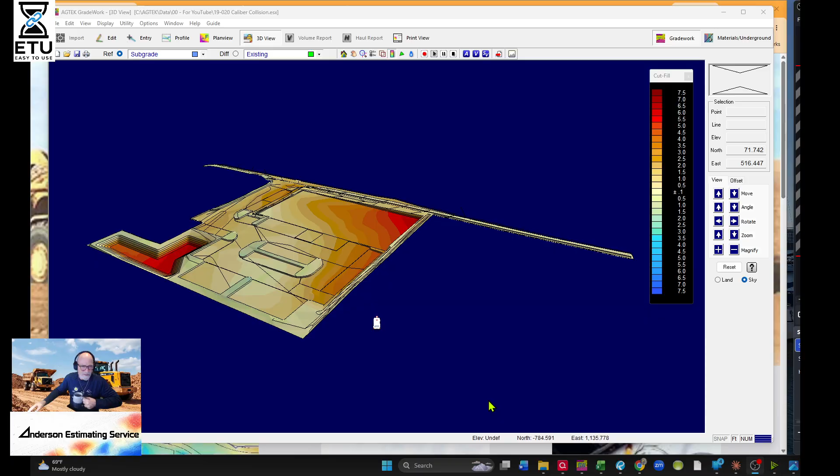So yeah, I just can't do anything. There's my website - I've been doing websites so much lately, and here's my website, ETU Hyperlink, track any link, and I put some videos on there. But yeah, I got top ranked in 4 hours. Got to go look at the video. But yeah, that's not this video.

This video is about Anderson Estimating Service. And oh my gosh, I have been so blessed - look at this, this is my schedule. I took out the job name, it's all confidential, but let's see if you'll be able to see this with the virtual background. I kid you not, this is amazing. I got dumped a bunch of work yesterday, and of course I said yes, of course, yes, of course.

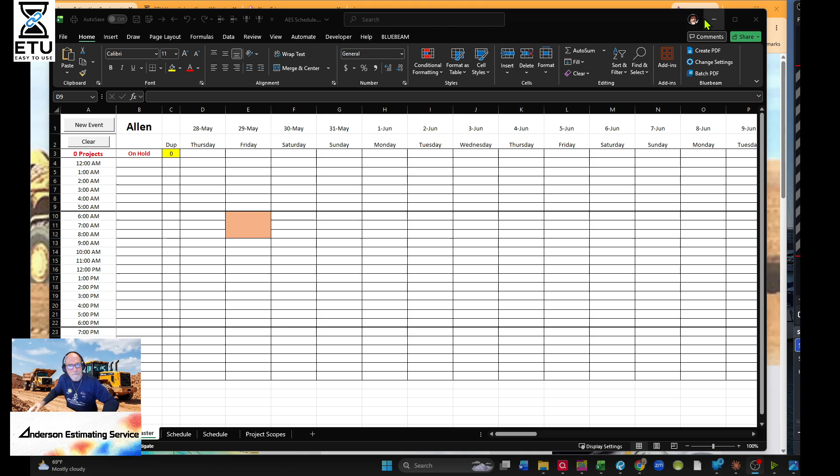So yesterday I have all these work orders - I don't know if you can see it, but there's 12. So I have like 40 hours worth of work. Thank you, Jesus, oh my gosh. Thank you everybody, that's awesome. So this schedule will completely fill up. That was amazing yesterday, going from nothing to this in like 4 hours.

In 4 hours, I wasn't just on page 2, I was right on top in videos. Within an hour it's just boop, YouTube just pops you right in there. I was right on the very top of DuckDuckGo, and then Google - that'll take some time, it's normally not like that. But you can go in there, and I'm gonna be checking on it every 2 days. It's so unique, the name ETU Hyperlink.

So anyways, let's go over this job. But first, coffee. Let me get you back over to the screen - AGTEK, so you can look at it. Let's go over to edit, design, data lines.

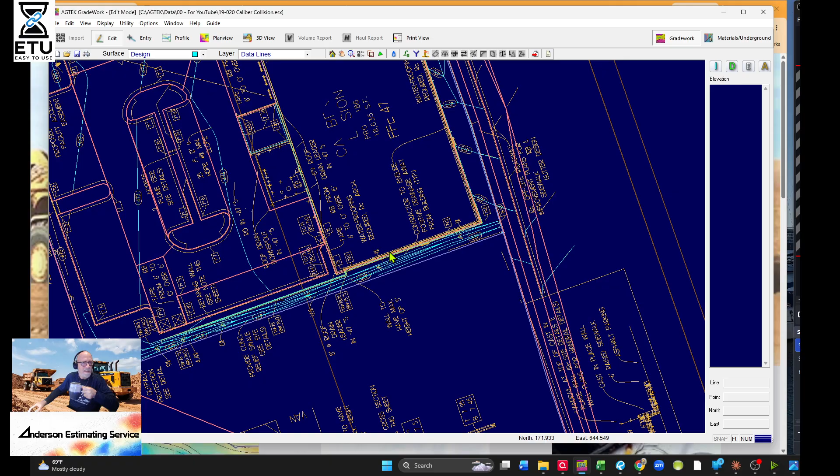Let's see, hopefully the sheets will come in. Come on. Insert - oh, can't find plans. That's why, because there's civil plans everywhere, so you don't want to do that. So let's go ahead and click on one, we'll see if it sees them. Yes, go ahead and show it where it is.

This is job 20. Yeah, I do about 300 jobs a year.

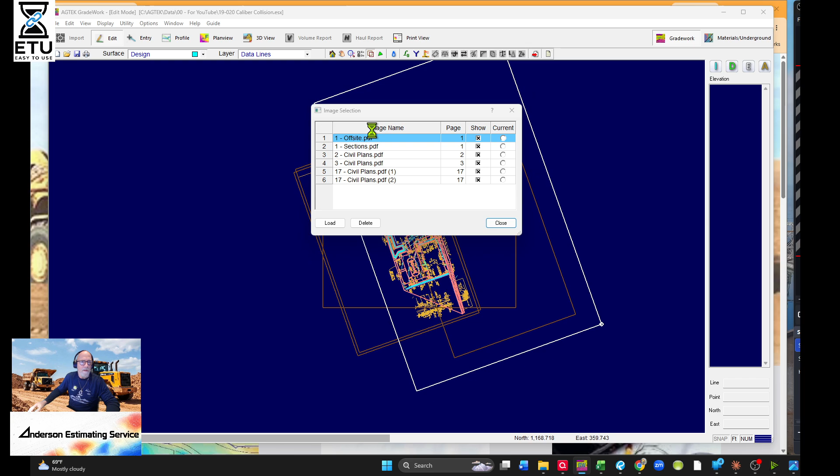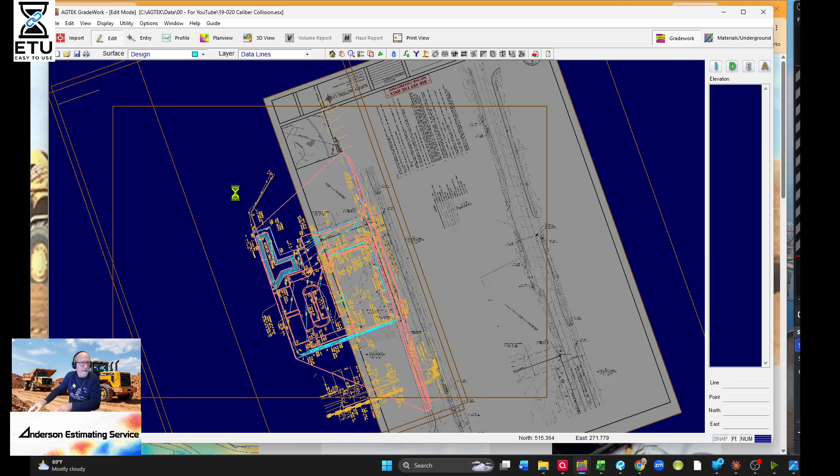It was called plan, we're just hoping it's the civil plan. Oh, I don't know, it says page 1, offsite. I don't know, it doesn't matter, we got it close, got it to the right place. Let's see if it just starts. Yep, just as I thought, now we got them. The rest of them are going to start coming in. Come on, baby. There we go, that's what we wanted.

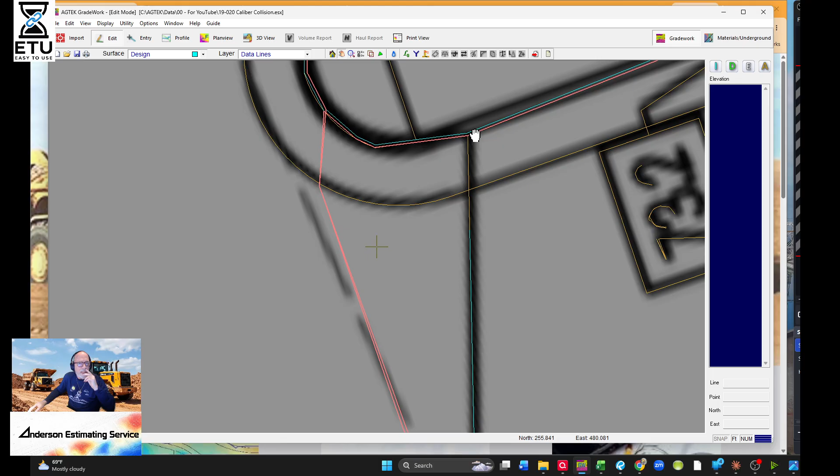It's so interesting the way every different engineer notes things - you always have to wonder, is it top of curb or is it finished grade? And you can see these contours, they ignore the curb, they blow right through the curb. If you clicked on it...

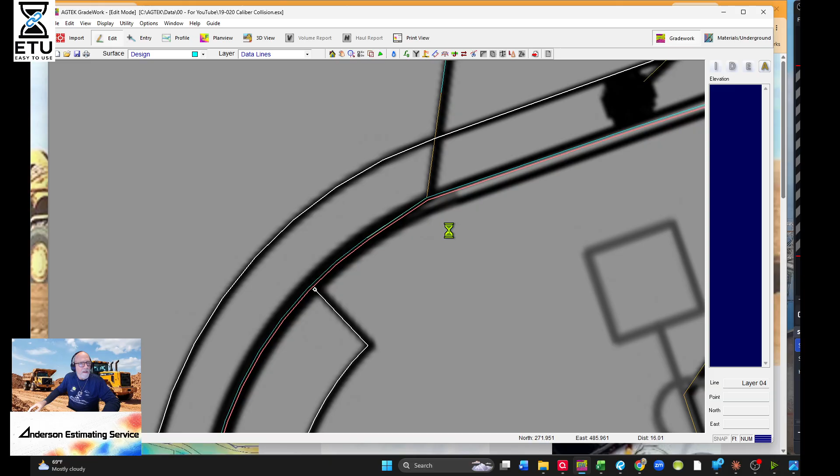Oh, it had all kinds of issues, there was trimming going on here. These plans were messed up - the contours, they can't blow through a curb. When a contour hits and changes grade, it turns. So when it hits a curb, it goes along that curb and then comes out the other side on the back of the curb. That's how I think of it.

You know, before there were computers, we used to actually hand draw our contours.

I really like this feature where it keeps track because I was always worried about trying to always look into the camera. They have this AI thing, and now even if I turn my head, even though I'm looking off to the side because I'm looking at my screen trying to do the controls, it makes my eyes look right.

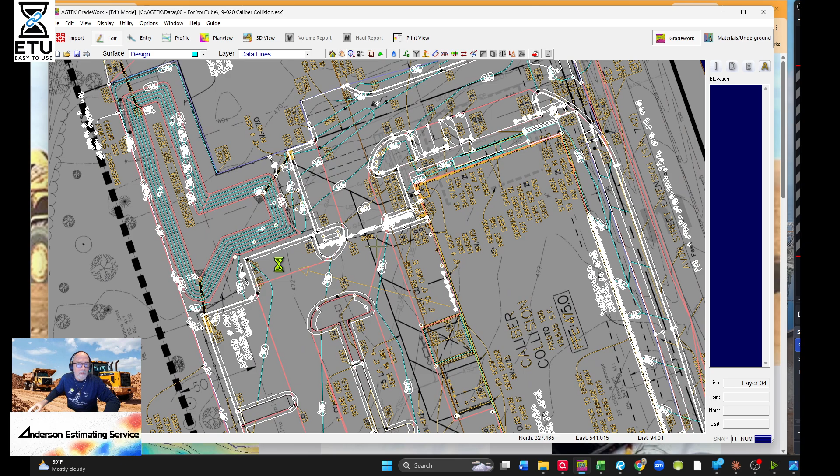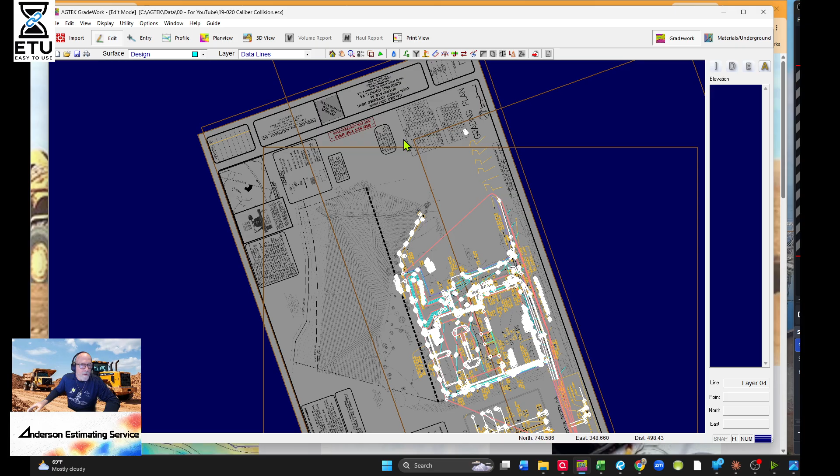But here we are back, so let's go. We'll do some curving here and I'll show you how that's done. This is a nice little job. Let's look at the 3D view. Where is this? Carrollton, Texas. It's not a CAD file, but I like to do the Google Earth approach. I'll show you what I do. Every curve, every point is entered when I do takeoffs.

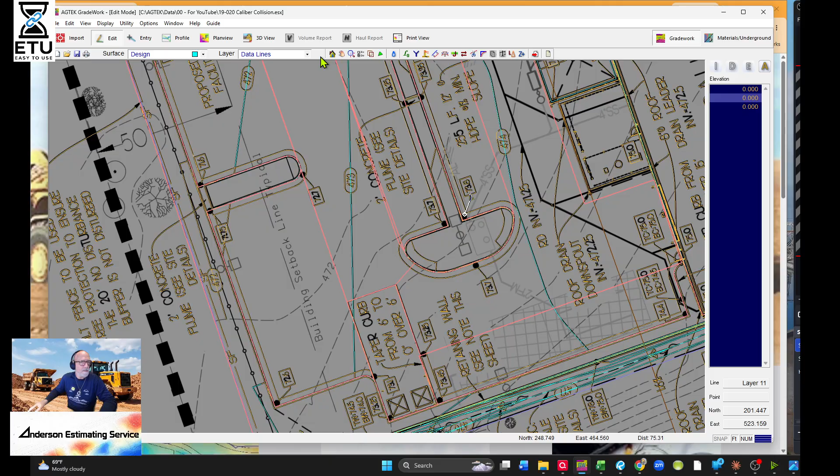Let's look at this. Let's get rid of the annotate, and let's get rid of the report regions, the balance region. Oh, that's probably for the offsite. And then sectional regions, and then we'll just show you the curve.

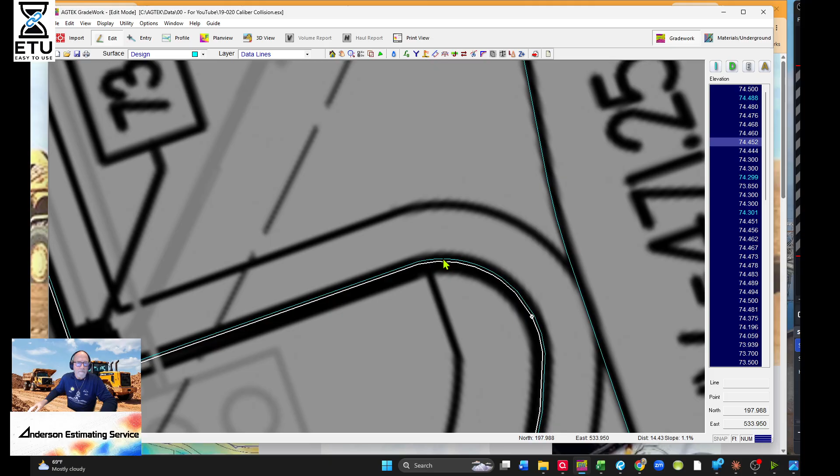You know, this is the old school way. I can't believe this was old school. This is when you did a tenth. If you looked down at the bottom, the distance - can you see that? If you looked really close on your screen and blew it up, it says tenth down here. That was the old school way.

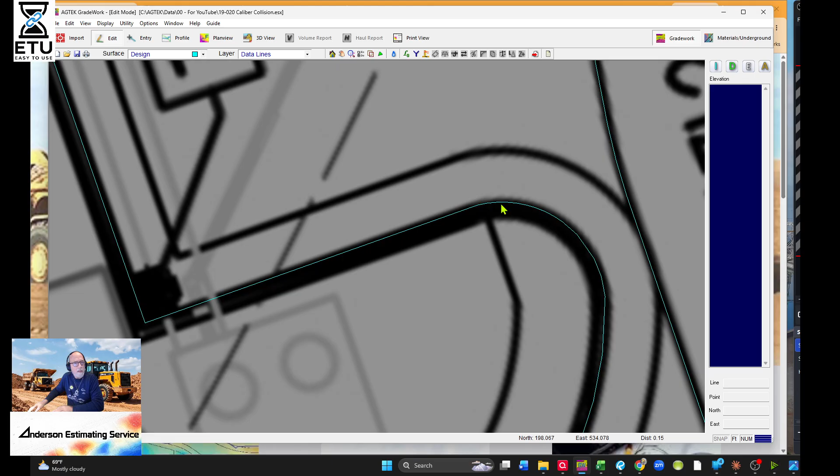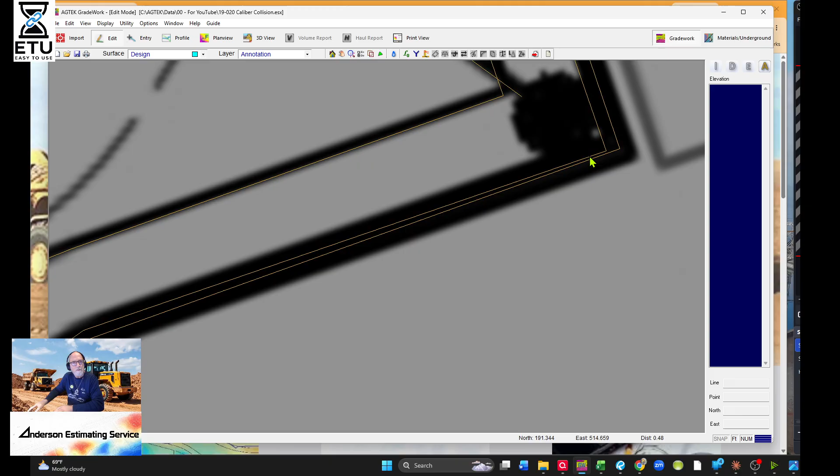But let's just get rid of this one, and we're going to annotate that one. These are okay to be there. This one I don't like - there's one extra one. Oh, that's the one we like, that's the one that came with the thing, so let's get rid of ours. Boom, this is the one that came with... oh, that's why, Control Z. I don't want this one. Get rid of this one. I'll be okay, I promise. There's a contour, we want to keep that. I just want to get rid of the ones that'll be in the way. There we are.

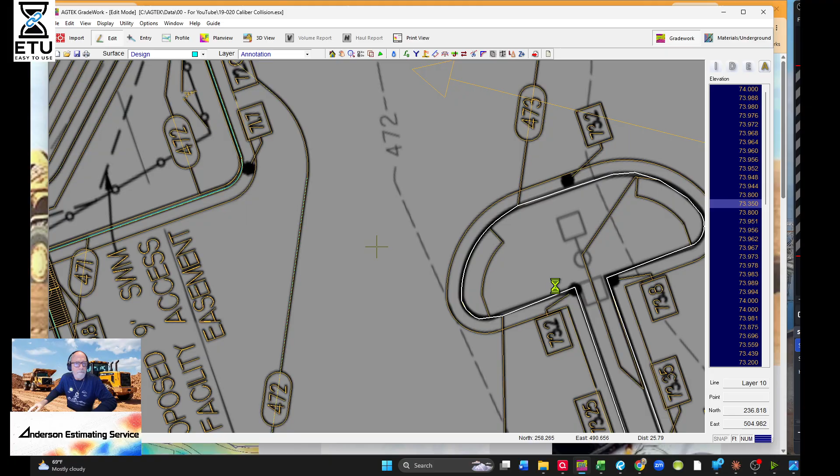And then I like to turn on the... since we're going to snap the points. So here's me, let's do a data entry, and let's make sure we're in 73. We truncated, you know.

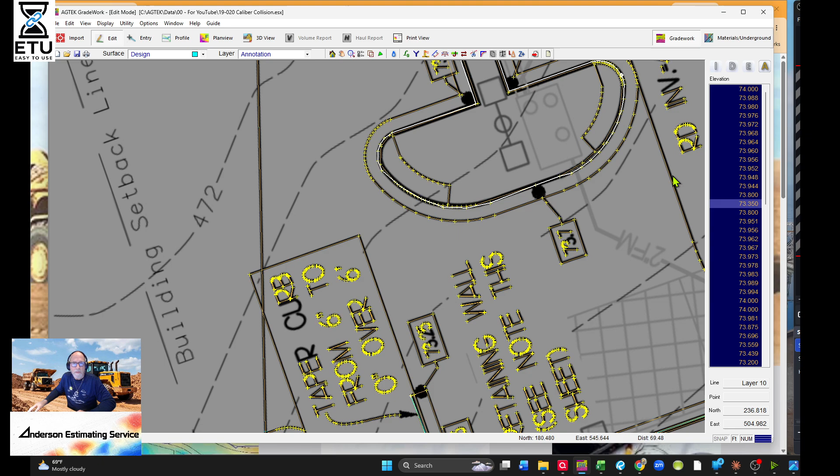Look, if you want to save time, get these elevations as truncated as possible. I try to look at the lowest point, but sometimes you have to enter three points, like 273. But this one, it looks like, and they're all easy, and they're all finished surface. We verified that before. 37. 73. 7302.

So there's, go into design data lines, and we want to back on the annotate. There we go, all right.

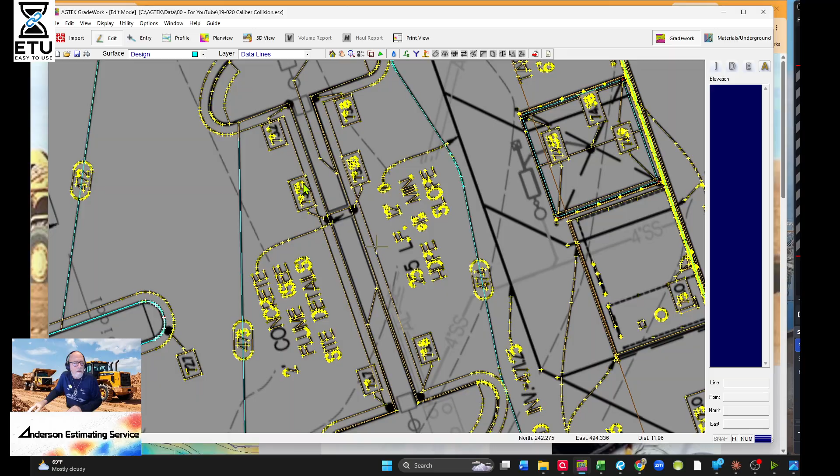So here we go, this is kind of a trick with AGTEK. I'll show you. So we're going to entry mode, and what I'm doing is I have - I don't want to show you a mouse and a keyboard, and I have the track mouse.

Can't see it, oh I can't see you. So what I have is a track mouse - see it there? Track mouse. And I keep hitting buttons and I put stuff in front of my face, my preview, and a Surface keyboard. So I use my left hand - I use both hands, one's on the mouse. I actually have it set up, not even kidding you, I have a left-handed mouse in case my right hand gets crampy because I have to keep working. So I use the left hand. I have a left-handed mouse. I just like doing what I do.

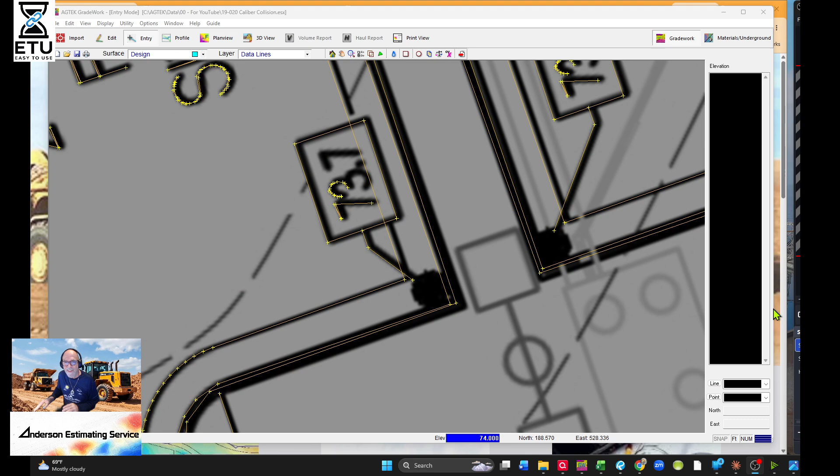So here we go, so 73. Let's make sure we're in data lines. Make sure where you're at, your entry mode, you're in the right job, and design data lines. Here we go. 73.7. And then we have snap on, and we get that circle right over that.

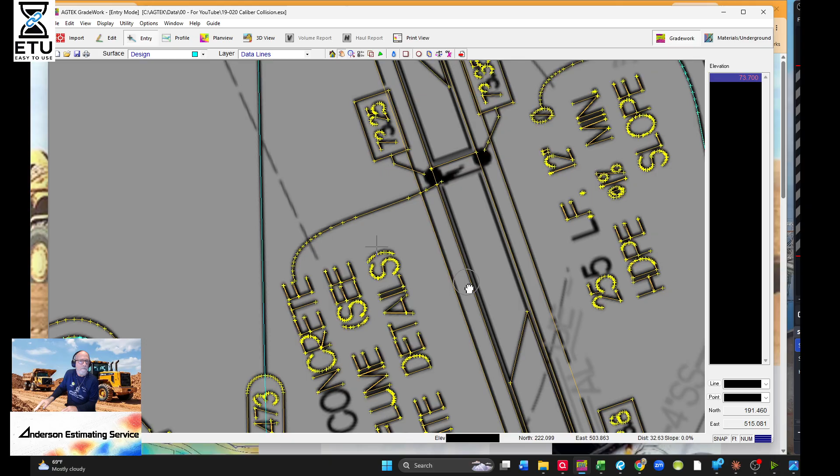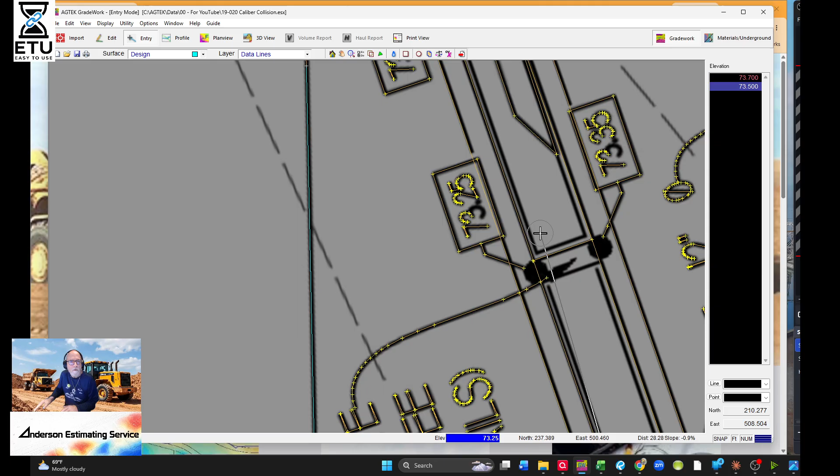Right, back out. Now this is a 73.5 because it's a 6-inch curb, and then I push F6. I try not to look down, but so I hit 73 in, and this one it looks a little messy. I just take the snap off. I like to make it as best I can.

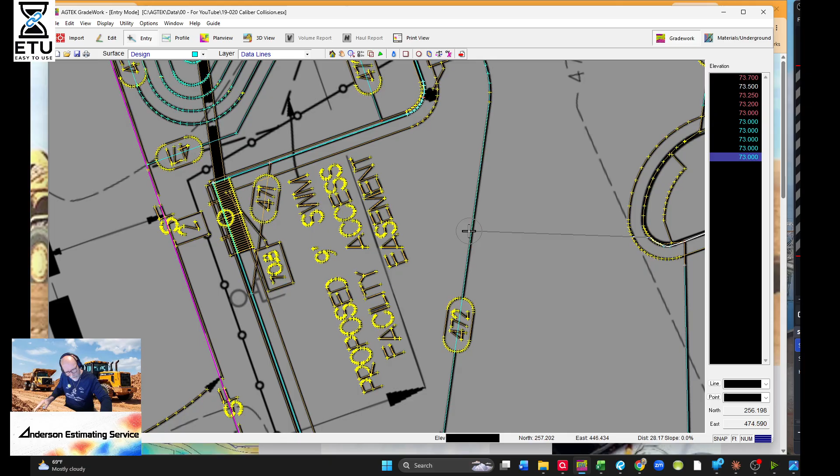So now I'm using AGTEK. I'm going to go out here because if I put 73 and 73, this would be all 73. No, so I go back out here, and I use that - oh come on, there it is, 72. And I just backspace, and it says the number, see up there, 72.8. And that way I get that little bit, and then we go back to 73.

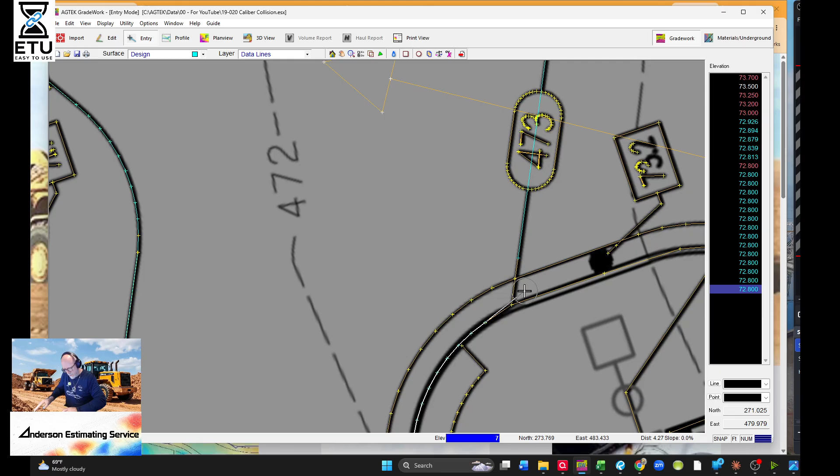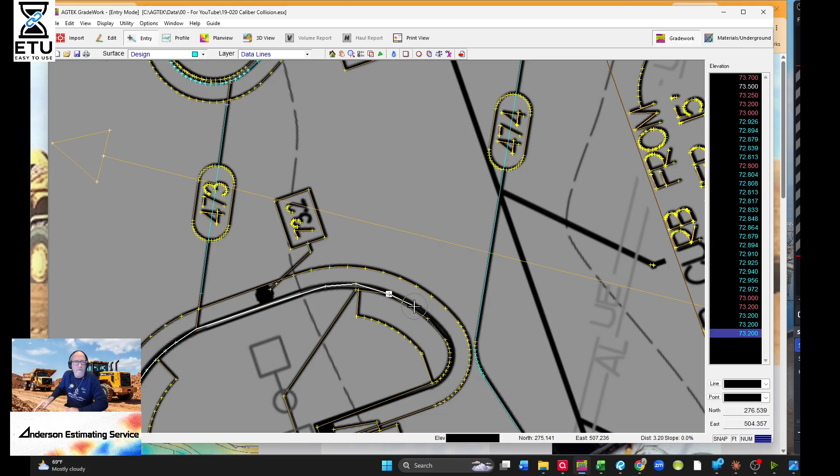73.2. I like to say it in my head because here's what I do - if I say 73.2 and then I say 75.6, my brain picks that up and I go, wait a minute, how did we get there? So yeah, it's just a cheat I've used for myself.

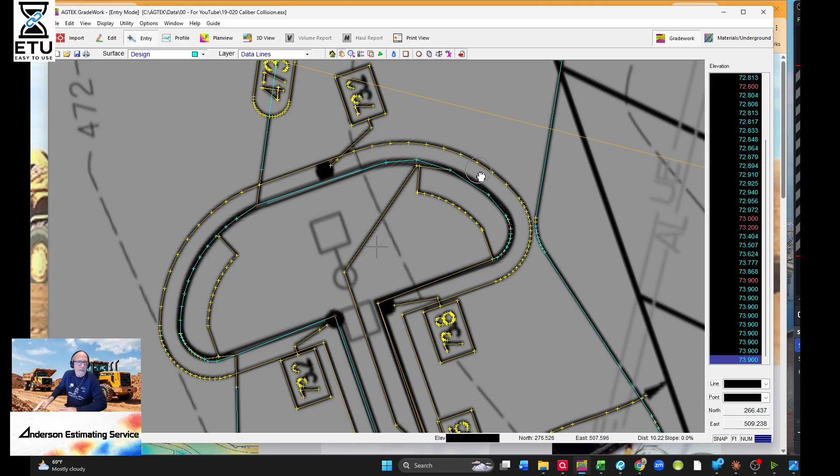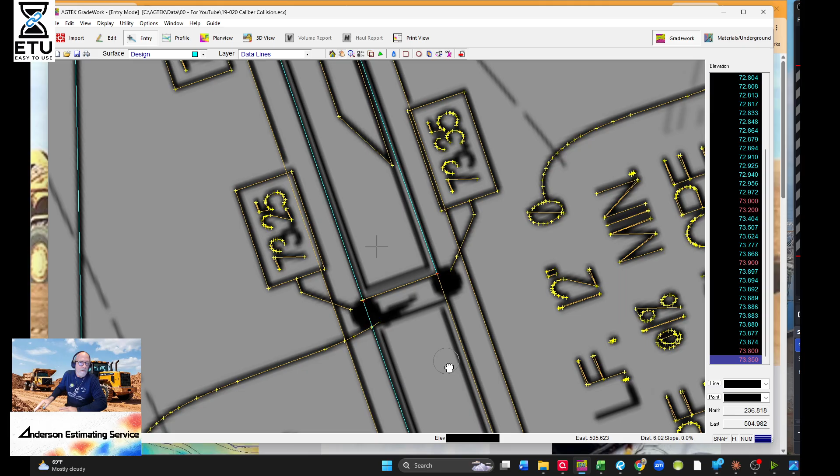Now I could go in, because this is a contour, I could put minus 0.5 right there, right? So this is probably 73.5. We're going, let's just go. That's what I was saying - I don't think those contours are in there because they didn't make sense. And sometimes what happens is the engineer is redesigning but forgets to redo the contours. It happens all the time - you forget to run contours again. It's another function.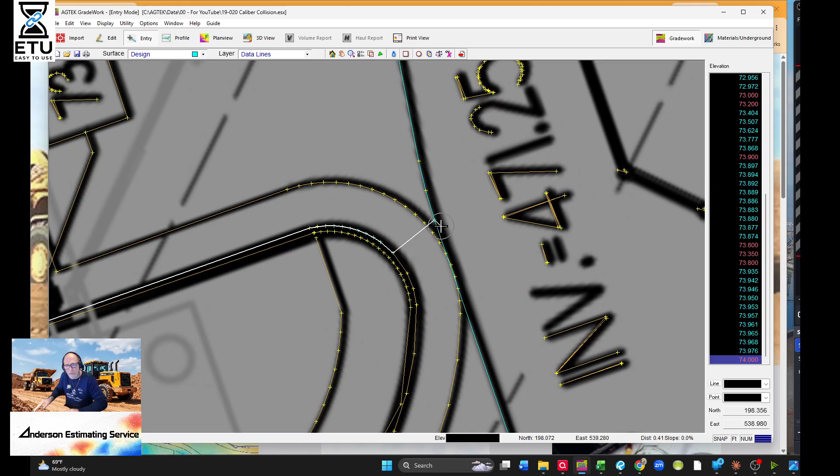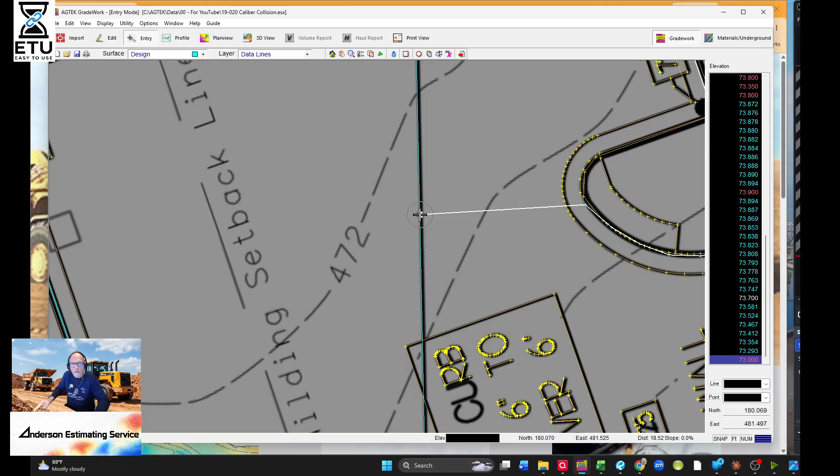Yeah, I can actually do this and just keep going. This is what I do for a living. And then this looks weird, it's not straight, so I'm just going to go here. I just unsnapped and double snap. These lines are really crooked. And then see, I'm going out here and catching this point so I can get that grade. I don't have to do any calculations, I let AGTEK do the calculation.

And then down here, it should go back to it. Now sometimes it snaps to it. You got to look and make sure that that number goes red. Yep, boom, there we go.

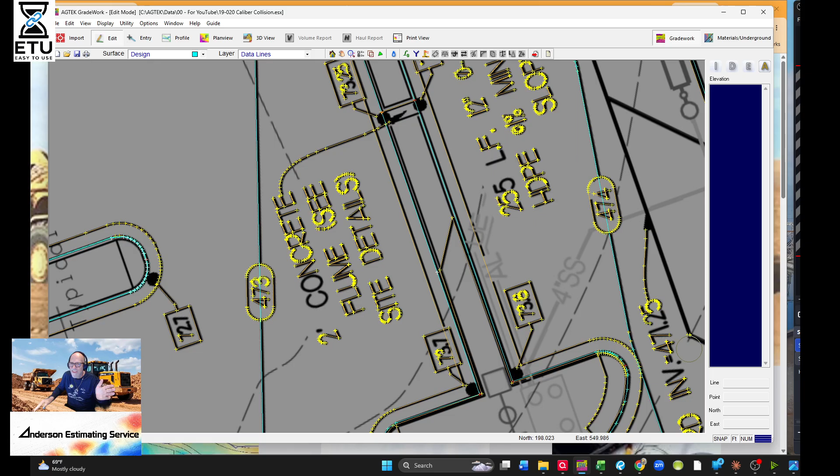Then before we offset, because we don't want to offset bad lines. Listen, don't offset bad lines. When you offset, make sure go to 3D view first, because you don't want to make a problem two problems, double your problem, and then you have to go back and delete. So always go and 3D view.

There we go, there's that curb. Let's do not subgrade, but we're just making our, see, there it is. And so we're going to go in and we're going to raise up that curb. You can see there's no curb there. So we're going to offset. And then let's label it so that we can use that top of curb later on. And we're going to go 0.5, 0.5.

Now, yeah, we're going inside. Just watch it, sometimes AGTEK gets a little funky and it goes in, out, like it points, it says inside, out. What you do to fix all that is just go ahead and, especially if it's an island like this, just click on it and join line. It's not going to hurt it. And then if it still acts up, just swap ends. It's just a bug, it's a workaround.

All right, let's see. There it is, get this overlay out of here. Move this key over. And coffee.

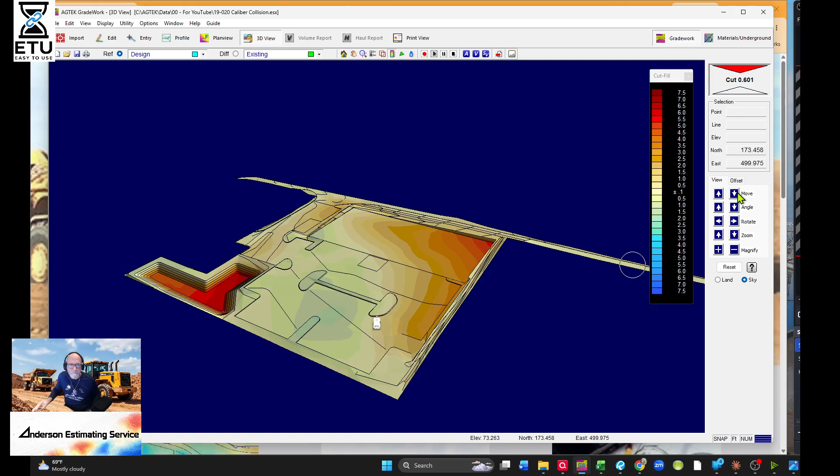So there it is. That's what it looks like. And I did it again. Dang it, I was talking about what was on the screen and I didn't show you the screen. So anyways, so now, yeah, I did it kind of. We'll see in the review. But hey, these are live, man, I'm not going to redo these. This is all from my search engine. So yeah, anyway, so there it is.

And then we can put the drop the sections in there. Oh, and then you can see there's a lighter section in there. Can you see the lighter section? Zoom in. Like there's a parking section on it.

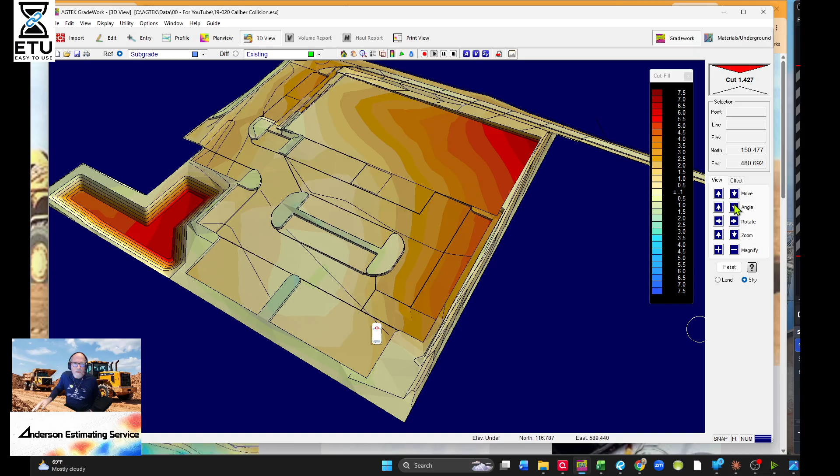Yep. Oh, and so if I went to edit, design, report regions, if I went here, oh, I was sloppy that day. Parking asphalt. I do parking AC now. Ooh, I'm so much, and that's like 12 and a half inches.

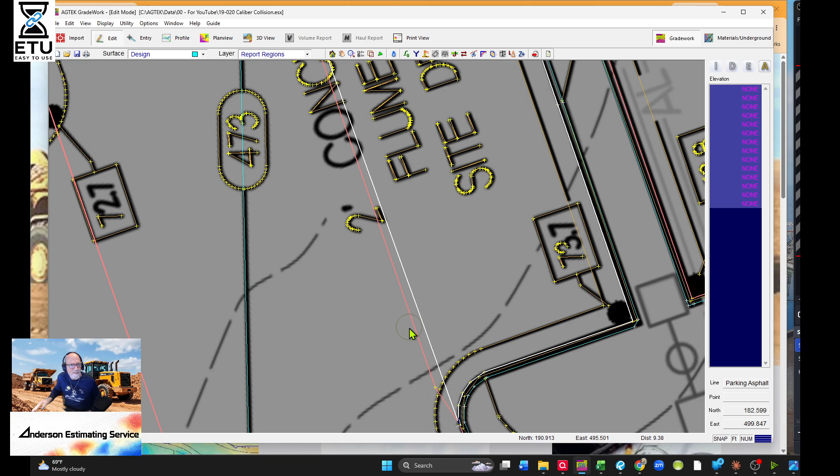And this is, it's like a half-inch difference. 0.07. Yeah.

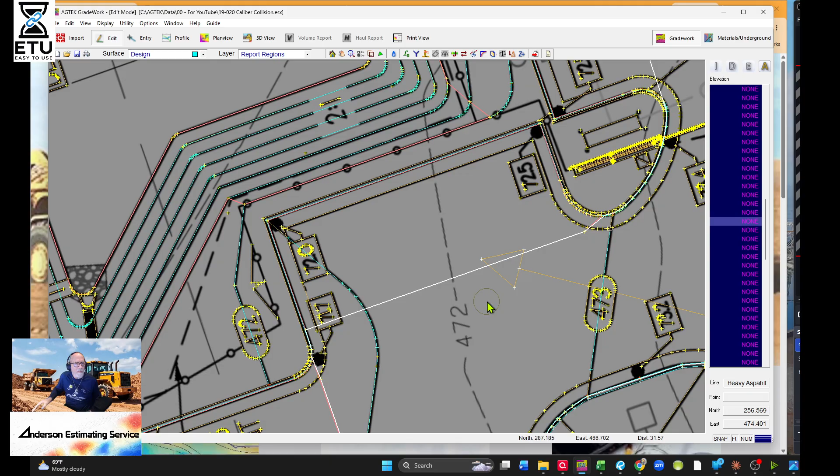Look, oh, busted. Oh my gosh. Epic fail. Yeah, so well, I wonder if you put the well, I'll get out of here.

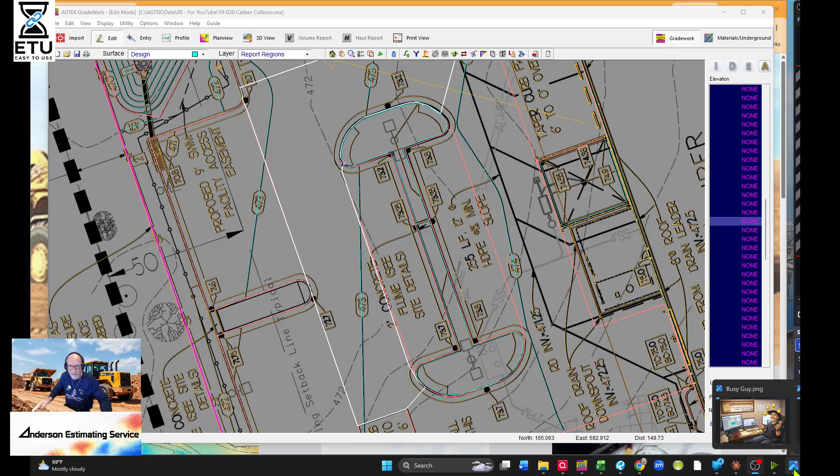I cannot believe I still can. Oh, hey, by the way, I'll tell you this funny story, this is kind of funny. I'll show you this. So yeah, this is a normal me. You know, the line between clever and crazy is whether it works or not. That's my saying, Anderson Estimating. This is, you know, everybody's got to have a ChatGPT image, right?

So yeah, and let's see, what was I going to say? Oh yeah, so there was a story. So one time I was chief estimator of a large grading company. And so some guy comes in my office, and he says, 'Hey, do you have a second? Do you mind, can you help me out with something?' And I said, 'Sure, come on in.'

Well, that's not really funny, is it? Well, but if you knew what was going on. So there I am, I'm sitting in my office. I've got a conference call speakerphone. I'm sitting there and I've got my phone, and I'm texting a foreman. I'm working on a bid in one screen, and one other screen I got a takeoff going. I've got plans over on the other side that I'm kind of flopping in between. I had a stand-up station. Yeah, and I'm just like, okay, but shh, if somebody comes on the speaker, you gotta shh. Yeah, I'm like, yeah, sure, why not? Bring it on, let's have one more thing.

Anyways, yeah, it was fun doing a lot, being really busy. I do like that, that's why I do like being busy. I do like juggling stuff, man, it's great. So yeah, I do estimating, I do drone processing. I have Pix4D, so I do drone processing. I do estimating, I can do anything, anything. Bring it on, let's have fun. All right, have a blessed day.